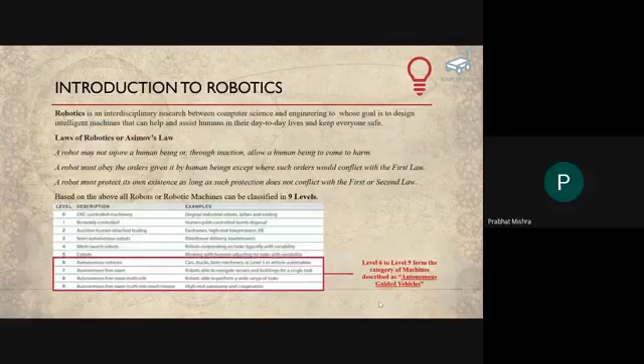Now let's go, before we go into the formal autonomous vehicle and technology, let us go to the basic laws of robotics, because an autonomous vehicle is a robot. The definition of robot stands as robotics being a science of combined engineering. It includes computer science, mechanical engineering, chemical engineering, electronics - it has got all the ingredients to make it a field of robotics.

Asimov's law says about how the robot should behave, and is a very important fundamental before we move forward, so I will just read the law. A robot should not injure a human being, or through inaction allow human beings to come to harm. Second, a robot must obey the orders given by humans, except when such orders conflict with the first law. Third, a robot must protect its own existence as long as the protection does not conflict with the first and second law.

A very concise information about how the robotics should move and how the robotic or autonomous vehicle should behave. If you look at it, there are 9 levels of robotics, and we will go to levels 6, 7, 8, and 9, which is today's topic - the autonomous ones. So let us look at

autonomous vehicles in the form of cars, trucks, farm machineries, autonomous free roam vehicles - robots which are able to navigate on their own terrain. Autonomous free roam multi-role vehicles are able to perform a wide variety of tasks as they have navigation, and autonomous free roam multi-role mesh swarm requires a high-end autonomy and cooperation. So I would move to the next slide.

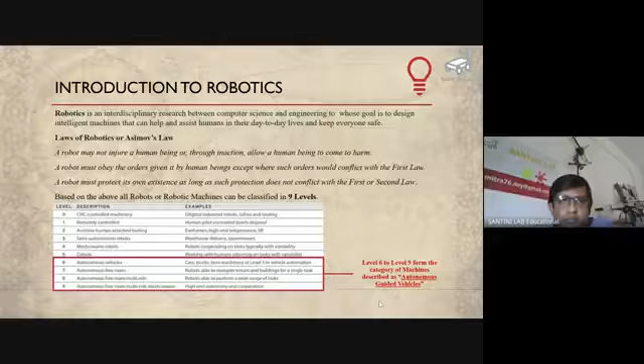The definition of autonomous vehicle is something which moves in an autopilot mode. As you know, autonomous vehicles need sensors, steering, GPS, various mapping methodologies like laser scan or camera to map the environment. So if I need to make an autonomous robot or autonomous vehicle move, I have to measure my environment in which I need to move. That is the definition of an autonomous vehicle.

There are 5 levels of automation, and this is attributed to the current vehicles that we have, or the cars which are autonomous cars. So there are levels 0 to 5. Level 0 is no automation - there is no automation in this vehicle, like a manual transmission vehicle with clutch, brake, pedal, and so on.

The second level of operation, level 1, is driver assistance. When you look at driver assistance sort of automation, it means you can control the speed of the vehicle using certain switches called cruise control switches. So these cars are called drive by wire cars, or DBW.

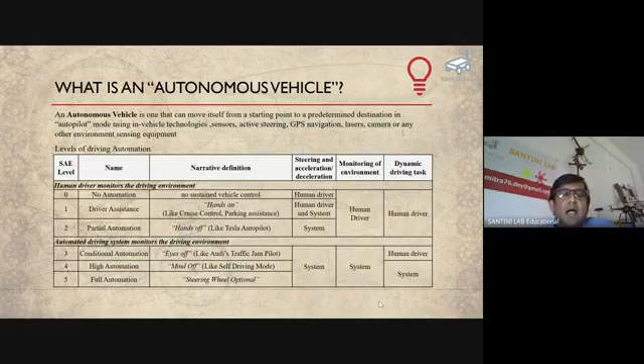So what I do is cut off the accelerator and move the throttle to a stepper motor, and I control the speed of the stepper motor with a switch on the steering wheel. That switch is called cruise control. In cruise control, the monitoring mechanism is a human driver, and the dynamic task is performed by the human driver, while the system just gives the input to the throttle body.

Partial automation is hands off, where the steering system is autonomous, but the braking and clutching system is human driven. Now let us go to a little more advanced conditional automation, which is the third point.

Conditional automation is where the eyes are off the vehicle in terms of automation. The steering is controlled by the system, the environment is controlled by the system, and the dynamic driving task is controlled by a human for the first level. When I talk about human, I keep the braking control under my own control.

High level of automation means all the systems are controlled through the vehicle system, that is, there is no human intervention, even the mind is off, and we will show a small video about that in the next slide. Full automation is where the steering wheel is optional - you don't need a steering wheel at all to drive the car. So these are the various 5 levels of industry automation practices in terms of vehicle autonomy.

Now I have some videos about how the technology has evolved from self-driving cars to the cars in the 21st century. But unfortunately there is some issue - the audio may not come. So what I will do is play the future of self-driving video, which is a self-explanatory video where you can see various vehicles like the Google AI vehicle, the Volvo, and the Tesla model. So I'm playing this video, just have patience. I'm really sorry that the audio will not come.

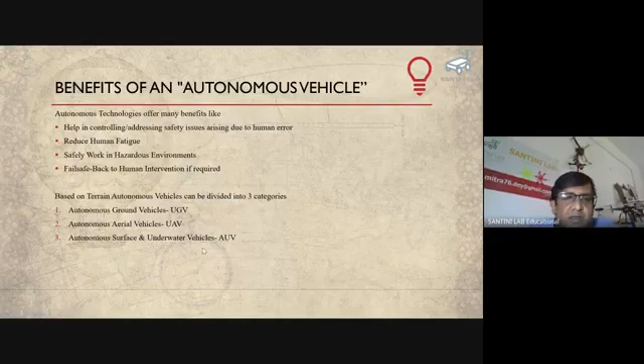Now, based on various terrains, how are autonomous vehicles used? There are three terrains: one is autonomous ground vehicle, which moves on the ground, called UGV; autonomous aerial vehicles, called UAVs; and autonomous surface vehicles or underwater vehicles, called AUV. Let us look at some examples of these UGV, UAV, and AUV.

The first, autonomous ground vehicle - you must have seen a lot of videos on Amazon delivery in terms of autonomous robots. This is the Amazon Prime robot, which moves around in various colonies in various countries in the US, and they deliver stuff - they deliver various couriers, so it is a contactless delivery. Next is the farming activity.

These are autonomous machines which are used for farming purposes. They are used in agricultural fields and do not require any human intervention.

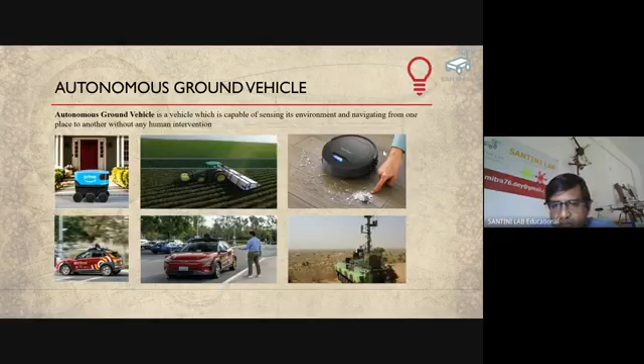Third, very common are robots used for cleaning our houses. This is something coming in demand as people use these to clean their floors. It eliminates the need for other help in cleaning. So autonomous floor cleaning robots are becoming popular.

Next, let us go to the vehicles, the Uber and taxis, which are used as autonomous vehicles. And the last and most important, for the defense sector, we have autonomous tanks developed by DRDO, under development for fully autonomous navigation and even using the weapon system on the ground.

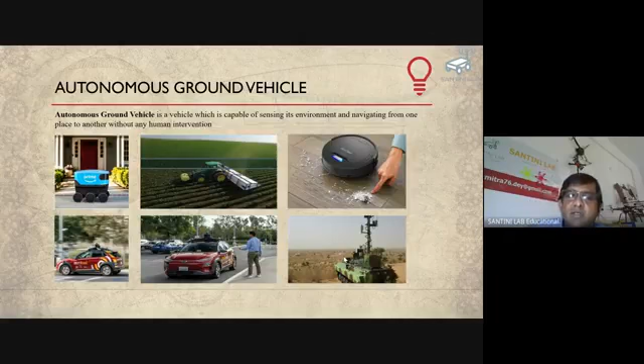Let us go to the autonomous aerial vehicles. I will start with the aerial vehicle Aura, under development by DRDO. This is an autonomous aircraft. It moves on a predefined path and has the capability to perform surveillance and other defense activities. We are very proud of this Indian autonomous aerial vehicle, the Aura.

Next, in my company, Hyundai has collaborated with Uber, and we demonstrated last year in Korea this autonomous aircraft. It is basically a flying taxi that we developed in South Korea along with our partner Uber. This is going to be commercialized in a few years from now as a flying taxi.

Next, let's go to the drones, which are used in agriculture for spraying. You must have seen a lot of drone activities during the corona times, where drones did a lot of surveillance as well as spraying. This is a very nice project.

Third is moving around and transporting food. Domino's pizza delivery systems, and other aerial vehicles you will see in the near future, are under development.

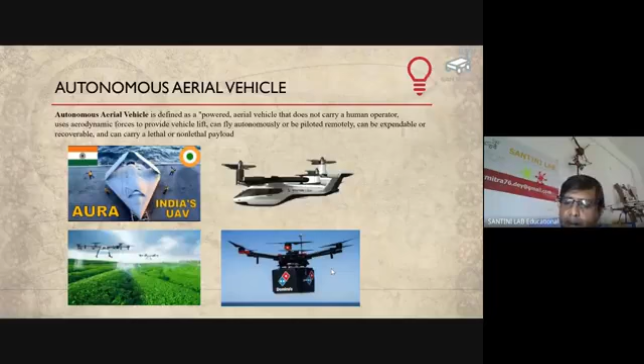In terms of surface and underwater vehicles, these are primarily used in oceans and rivers, collecting conditions and samples of water autonomously. It is used in underwater exploration, to search for underwater life autonomously so you don't need any human being to do that. Then you have underwater weapon systems used in the defense sector, exploration vehicles, and autonomous boats or ships doing surveillance or testing various samples. These are the applications used in unmanned sea vehicles and underwater or surface vehicles in today's practice.

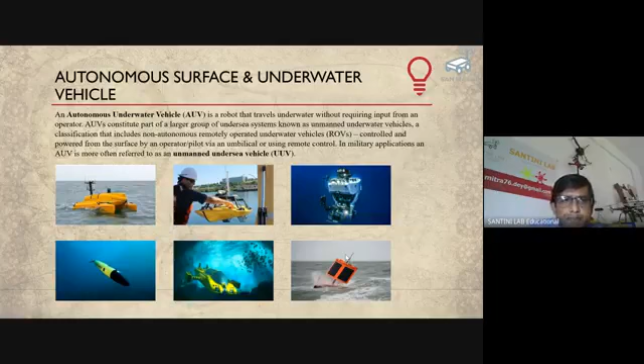Now let's look at how an autonomous vehicle should move on a road. I will take a bit of time on this slide. If I need to move any autonomous vehicle on the ground, I need to sense the environment, so I need to have a map of the environment, called a global map.

A global map is something available right now in Google Maps. It has a global map where, say, if I go to sector 21 in Noida, I have sector 21 here, sector 25 here, sector 18 here, and my robot is aware of what roads are available there.

The second map is called a local map. A local map means that in my global map I have fixed structures like flyovers, fixed structures like trees, or fixed structures like buildings. In a local map, I have temporary structures also. So this is the difference between a global map and a local map.

When I make a local map for my robot or autonomous vehicle, it talks about instantaneous objects on the road, which means the car that is 5 meters from me, a bicycle rider who is 10 meters from me, and an obstacle which is 5 or 7 meters from me.

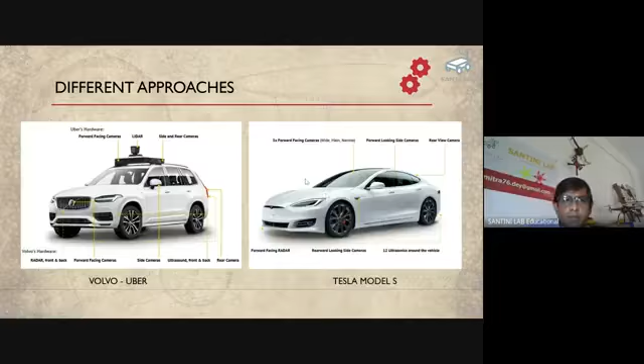When all this information goes in, we do simultaneous localization and mapping, called SLAM. Once SLAM generates a global map and a local map, we do path planning. In path planning, we control the steering, acceleration, braking, and use image AI to see signaling and movement. So this is how it works.

There are two types of artificial intelligence used sequentially, where the driving process is decomposed into components of various pipelines like sensing, localization, and path planning, and an end-to-end solution based on deep learning. This AI and deep learning is a separate subject, but I will give you some examples when I play the actual autonomous vehicle video, so you understand how the AI works with various strategies for autonomous driving.

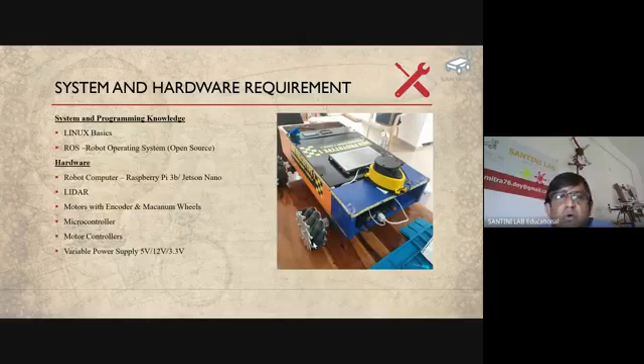It has got a basic microcontroller, motor controllers, and variable power supplies of 5 volt, 12 volt, and 3.3 volt based on the various sensor requirements.

So what is ROS? ROS is Robot Operating System. It is an open source system. When you learn ROS to make an autonomous vehicle, it is completely open source. You need to make various packages required for your robot to carry out various functions of autonomous navigation, or you need to make an arm robot.

So this is a small video about what ROS is. I'm sorry the video will not have audio, but just go through this video about 10 years of what robot operating system is all about. So I'm playing the video, Pravat.

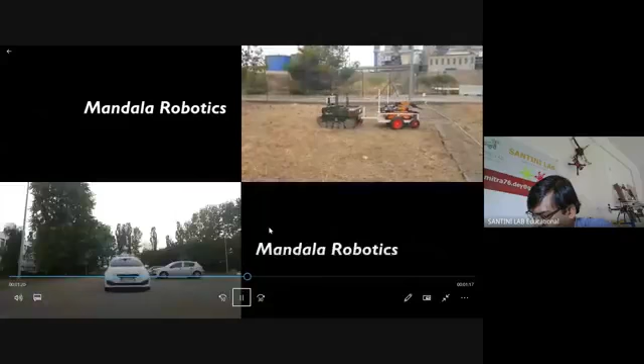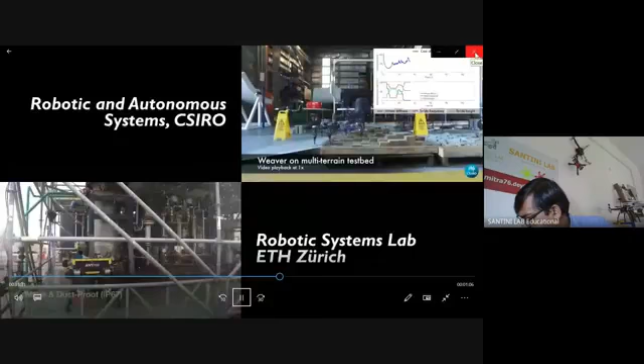So that was the video.

So that was the video. I cut it short because I think there's a lag, and I will share this video to all of you later through email. So as I was discussing, ROS is an open source robot operating system. It is completely based on the Linux system. If you want to learn ROS, you need to start with a little bit of basics about Linux, then how to install it on a dual boot, which Mayank has done for me a few years back, and I'm using that. It's a very interesting subject, robot operating system, and very powerful software for autonomous ground robots.

Now, various components that I've used in this robot operating ROS robot, as I said, we used a power supply, which is inbuilt 12 volt, through various controllers, and we used 5 volt as well as 3.3 volt converters for other sensors like IMU and other encoders. So if you look at it, it has got a motor controller.

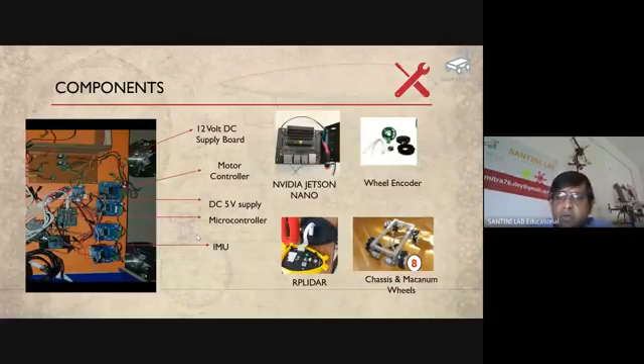In terms of Jetson Nano, as I said, it has a bit better processing. It has got 4 GB memory with a 64-bit processor, as well as 4 USB drives. It has got camera connectivity, and good quality video for image and AI. We prefer this. We started this project with a Raspberry Pi, but we found some hang-up issues, so we shifted to a Jetson Nano for this robot.

So a little bit about the wheel encoder, a very important part of the robot. I need to move how much distance in X, Y, and Z, so I need to have a feedback loop. This is a Hall effect encoder. Hall effect basically gives a potential difference when the magnet turns. So there is a magnet and the wheel. You can see this is a small magnetic wheel and the rotor, so there is a magnet here.

It goes into the bottom of the shaft of the motor. You can see the 4 motors of the robot. So this is how it works.

There are 4 outputs of these encoders: plus, VCC, ground, as well as encoder A signal and B signal. Why do we need 2 encoder signals? When the wheel turns clockwise, I get a positive pulse. When the wheel turns backward, I get a negative pulse. So I need to know the rotation direction, as well as distance, how much the robot has covered. This is the advantage of using an encoder.

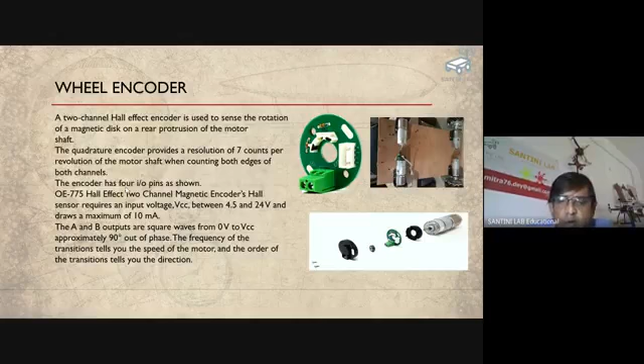Now this is one of the final slides that we have. I'm trying to explain how this robot performs a laser scan through the LiDAR, how the LiDAR works, and you will see the live scanning that happens when the robot moves. I will play this video, and after the video I will explain a few points.

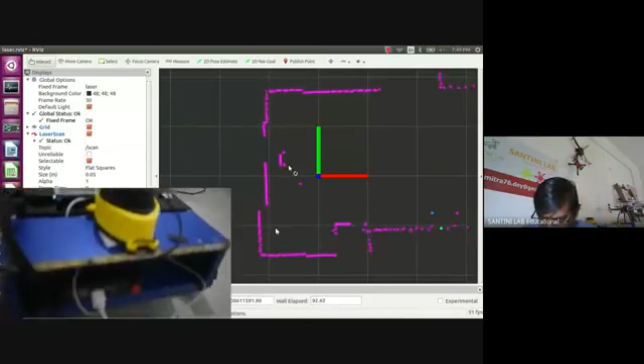Okay, can you hear me? Yes sir, am I visible? Yeah, we can hear you.

So now you can see there is a 360 rotation of the LiDAR, and the robot is placed over here. So when the laser scan moves, it makes the mapping of the walls which are in this room. You can see the laser scan has made the mapping of all the walls in this room, and also various objects that are there.

Now you can see I'm moving my hand, and you will find that the lasers deflect and show the moving hand in the image. Please notice this very carefully, because this is the background of autonomous object detection when the vehicle is moving. This is a very important input for the autonomous vehicle system to understand the movement of a vehicle. Just see once again.

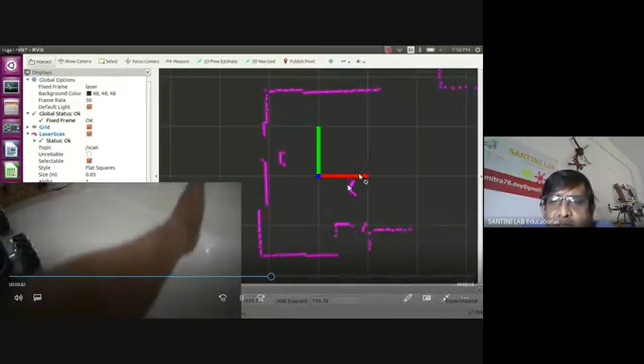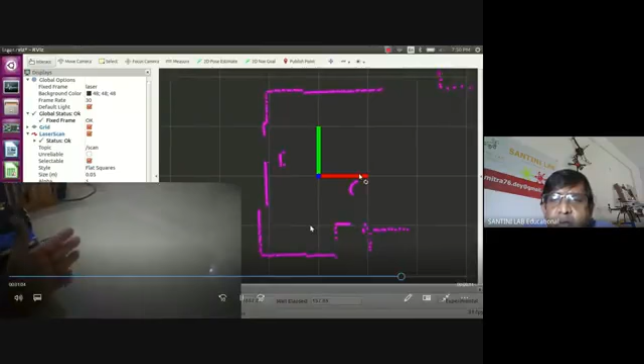You can see my hand is moving, and the laser scan is also reflecting back, moving with my hand. This is a very important factor for the autonomous robot to decide whether it should move or select this path for movement.

Now I go to G mapping, which is, as I said, the global map and local map. I will explain how this robot makes the map of this room so that it can navigate autonomously. The package I'm using in robot operating system is called G mapping. There is another mapping called Hector SLAM, but we are using G mapping because we are using odometry data.

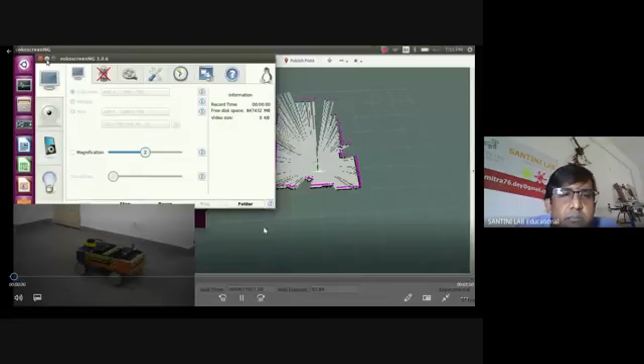So my robot is here, and the laser scan has now started building a two-dimensional map. When the map is created, you will find certain black spots and certain white spots. The black spot is stored as 1 in the matrix of the map, which says it is an object. So the global map says there is a chair there, or a table there, or a wall there, and it becomes black. Black is stored as 1, and the empty area is stored as 0. This is how the autonomous robot knows what is an object and what is not, for obstacle detection.

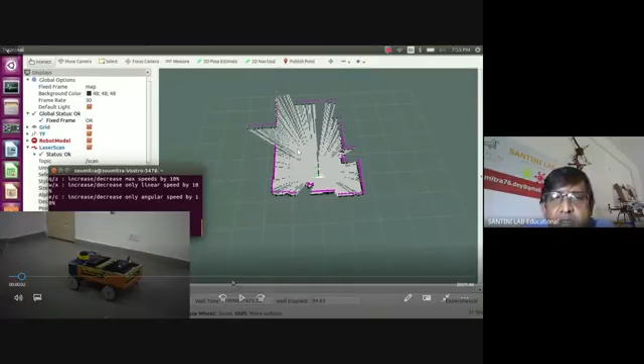So just see this video carefully, how the map is created. Now the robot is moved using a teleop keyboard. I'm using my laptop keyboard to move the robot to create this map. Just see this carefully.

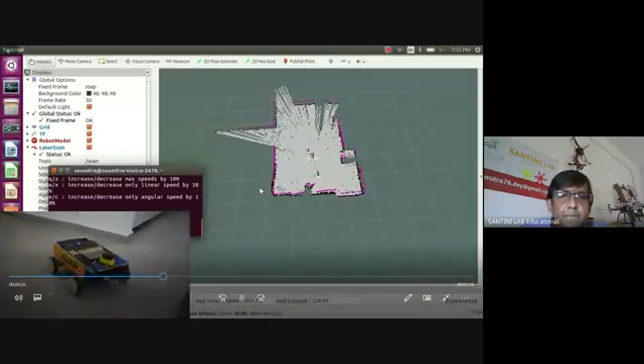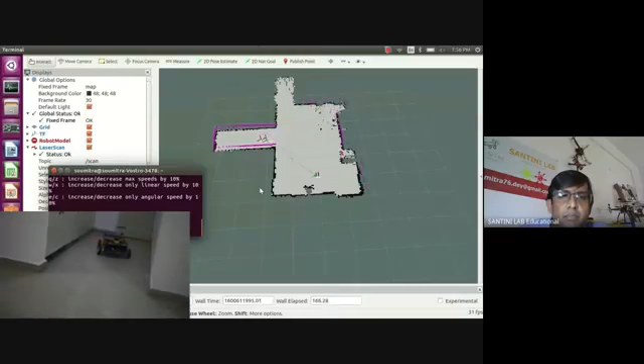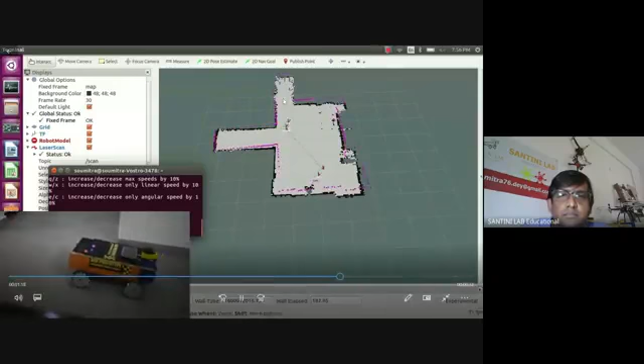You'll see the map here. Now as you see, the robot has moved through the entire room. It went here, it went to the end, and it created the exact two-dimensional map of the house from where it needs to move. Think of this as a global map.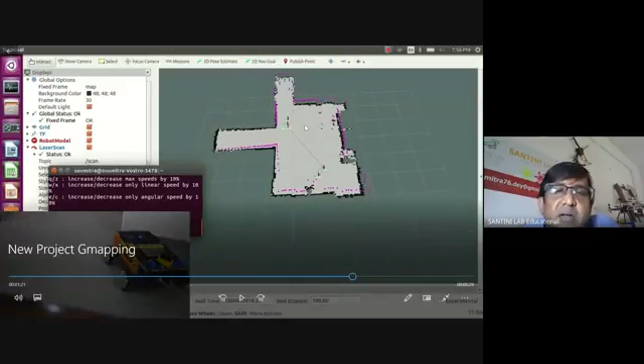Now let us go to a local map. Can you see these black spots? These are the obstacles, stored as an obstacle in the global map. So when the robot navigates autonomously, in its memory it will have the global map, and it will know that 5 meters from here there is an obstacle. But if I remove that obstacle, the robot will clear it in the local map. So that is the difference between a global and a local map.

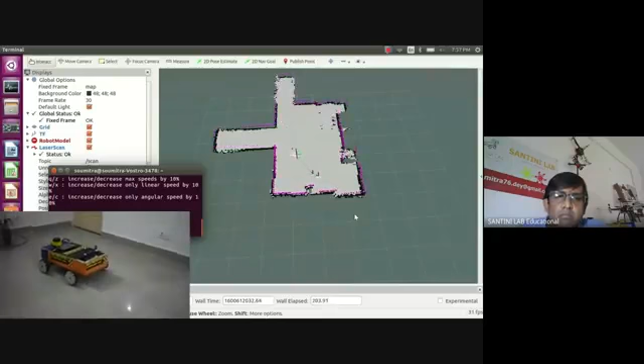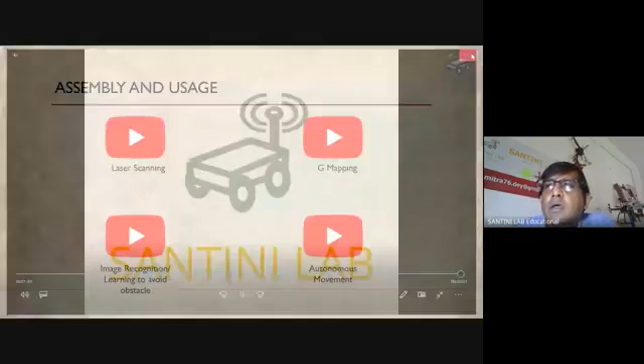So that was all about how the map is created. Now what we have done is laser scan the area and made a map of the room. Now let us see a camera-based navigation video, based on the camera view. I will play the video, and you will find the robot moves through various obstacles through camera recognition.

So that was the movement happening and various obstacles being avoided. Now I will show a final video of autonomous movement. In this video, on two sides, one side you will find the entire map, the local map, and the path planned by the robot in red and the actual path. I'll try to show this video, and since there's no audio, I'll do my best to explain it.

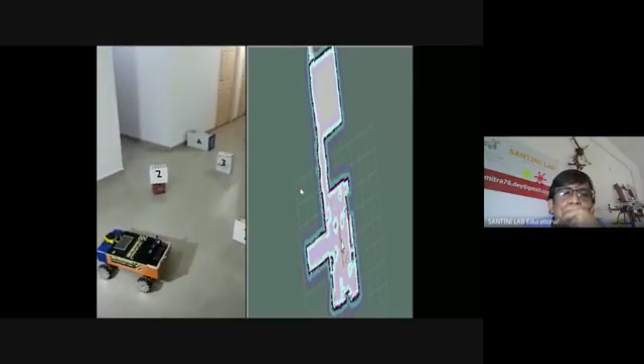So that was the end of the autonomous movement, autonomous G mapping, and how the robot traveled from point A to point B with various obstacles, how it checked the local map, and how it went into autonomous movement with the global map. This is the very basic educational robot that we have built for all of you to understand. We wanted this course to happen in a real lab or actual school, but due to circumstances we could not launch this earlier.

So this is something to help you understand how you can build an autonomous robot, how you can learn robot operating system, and how you can autonomously navigate it. The same applies for other autonomous vehicles, whether you make a boat or a small drone which flies autonomously indoor as well as outdoor. So this was all about autonomous vehicles and robot operating system.